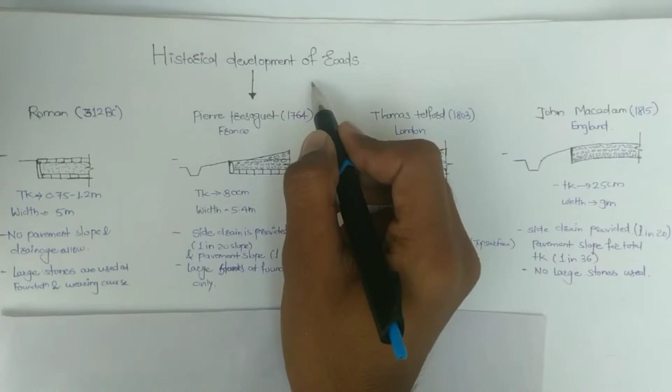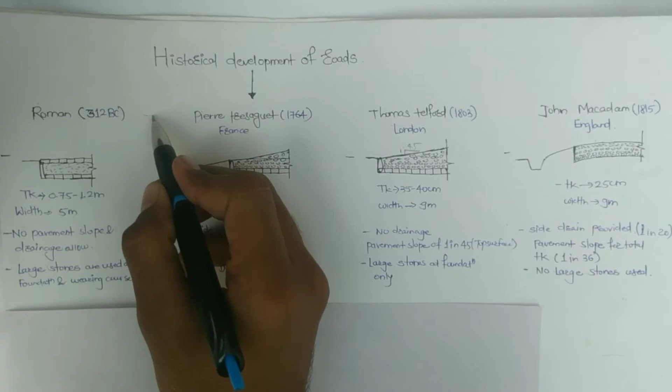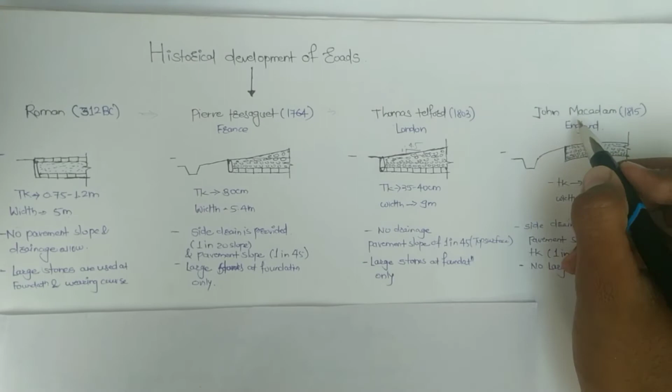First, Romans constructed roads in 312 BC. After some modification in the Roman construction techniques, Pierre Tresaguet constructed roads in France in 1764. After him, Thomas Telford in London constructed roads with some modification in 1803. After him, John Macadam in England constructed roads in 1815 with some modifications.

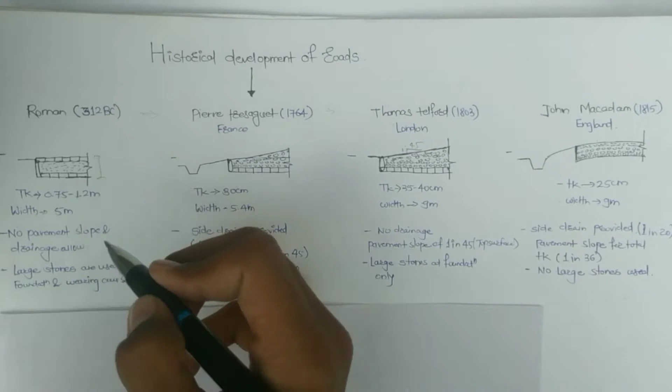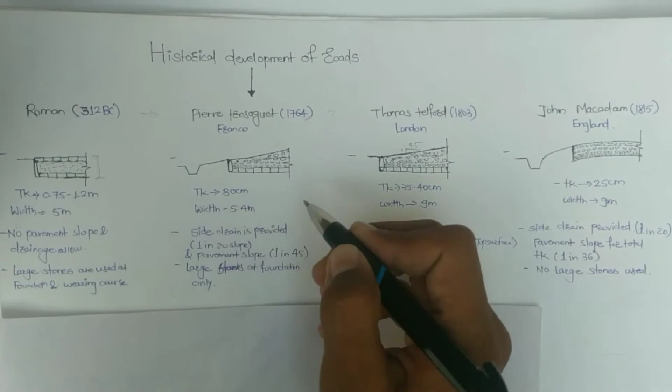In Roman roads, the thickness of pavement is 0.75 to 1.2 meters. Here the thickness is 30 centimeters, 35 to 40 centimeters, and 25 centimeters. Whereas width of the road is 5 meters, 5.4 meters, 9 meters, 9 meters.

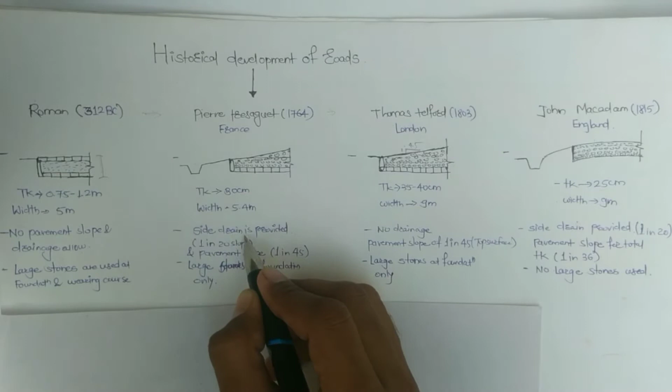In Roman roads, no pavement slope and drainage is allowed. Whereas in this construction, side drains are provided with a slope of 1:20, and the top surface pavement slope is 1:45.

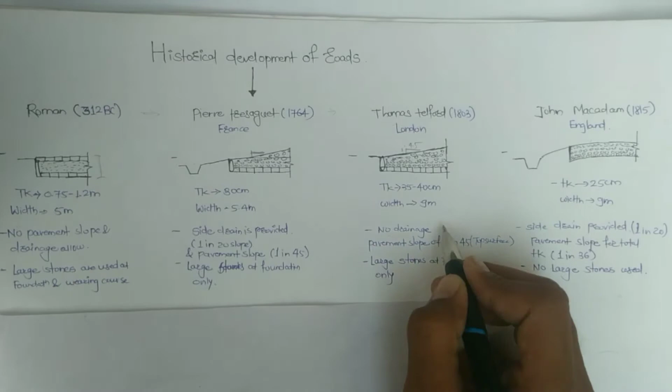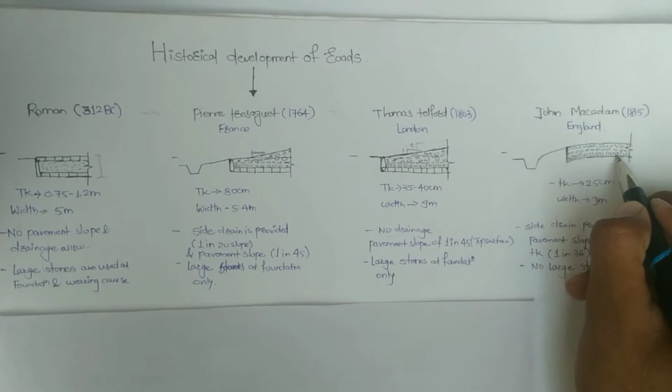In this construction, no drainage is allowed, no drainage facility is provided, with a pavement slope of 1:45 at the top surface. In this construction, side drains are provided with a slope of 1:20, and the whole pavement thickness is provided with a slope of 1:36.

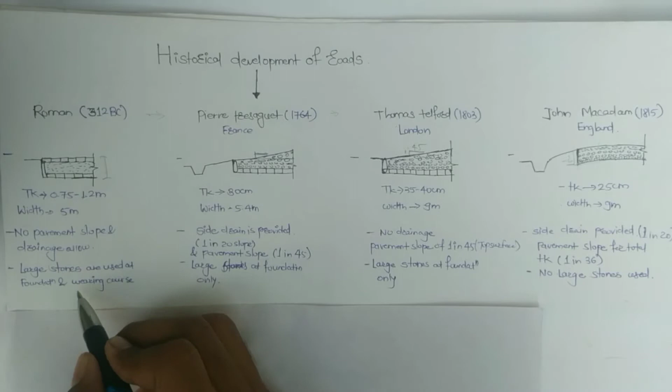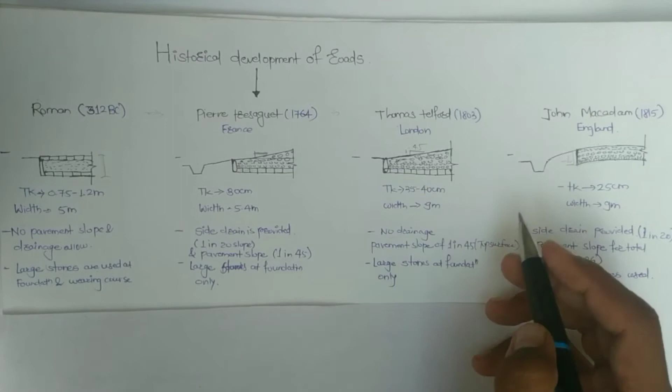In Roman construction, large stones are used at the top surface as well as the bottom. In this construction, large stones at foundation are used only at the foundations. Similarly, in Thomas Telford's construction, large stones at foundation only. In John Macadam's construction, no large stones are used.

Development of roads in India.

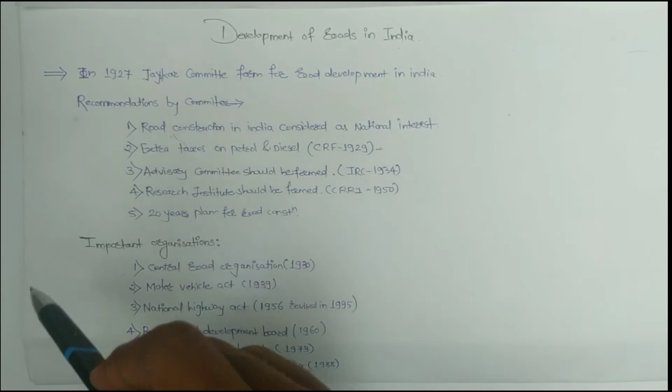In 1927, the Jayakar committee was held for discussion on road development in India. After the discussion, the committee gave some recommendations. First, road construction in India should be considered as a national interest.

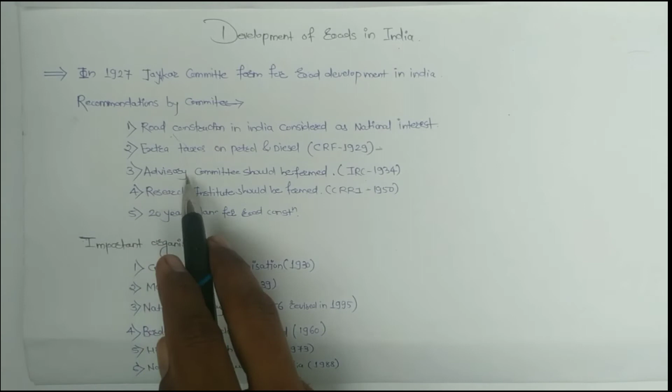Next, extra taxes on petrol and diesel will be collected by the organization Central Road Fund, which was formed in 1929. An advisory committee should be formed; that committee is the Indian Road Congress, formed in 1934.

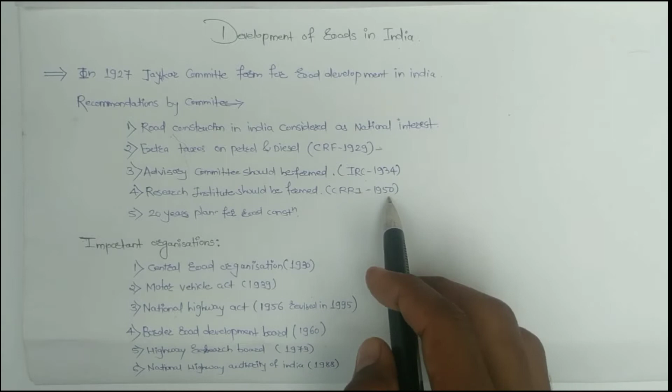A research institute should be formed; that is the Central Road Research Institute, formed in 1950. The fifth recommendation is that a 20-year plan should be prepared for road construction.

These are some important organizations which were asked repeatedly in the examination. First is the Central Road Organization, formed in 1930. Motor Vehicle Act in 1939. National Highway Act 1956, which was revised in 1995.

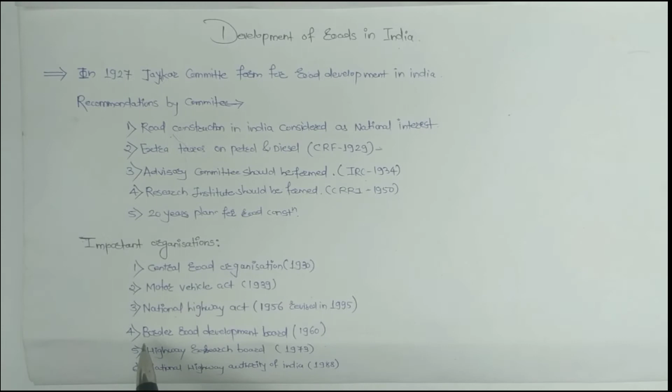Border Road Development Board in 1960. Highway Research Board in 1973. National Highway Authority of India.

Regarding the 20-year road plan: out of the 5 recommendations, the Jayakar committee gave one recommendation that a 20-year road plan should be prepared, one by one.

There are three 20-year road plans: the Nagpur Road Plan, the Bombay Plan, and the Lucknow Plan. The Nagpur Road Plan runs from 1943 to 1961; it is not actually a 20-year plan, it is an 18-year road plan.

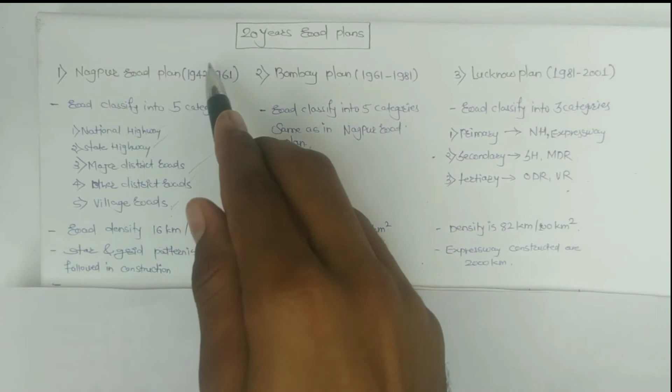After 18 years, the government realized that it was not efficient for road development in India. Hence, after 1961, a new plan was adopted, the Bombay Plan, from 1961 to 1981. The Lucknow Plan runs from 1981 to 2001.

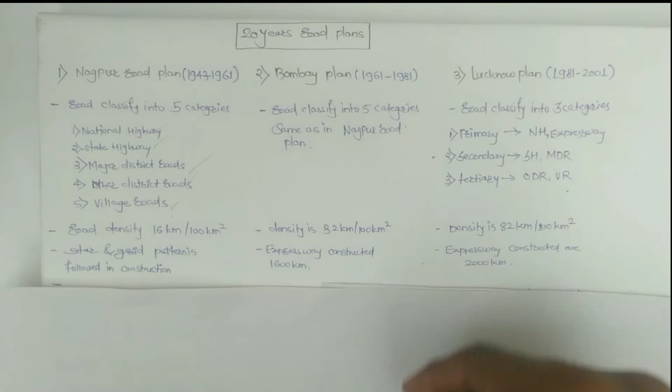We are going to compare these 3 road plans point by point. First is on the basis of classification. The Nagpur Road Plan is classified into 5 categories: national highway, state highway, major district road, other district road, and village road.

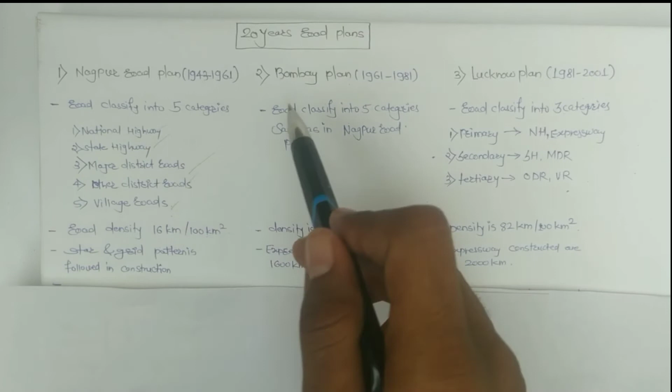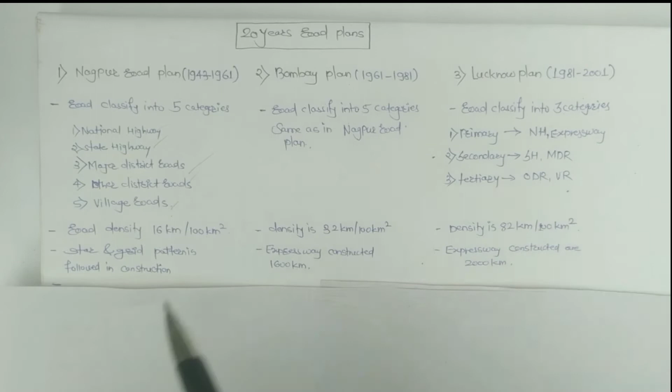Similarly, the Bombay Plan is classified, but in the case of the Lucknow Plan, roads are classified into 3 categories: primary (national highway and expressway), secondary (state highway and major district road), and tertiary (other district road and village roads). Next point is on the basis of road density.

In the Nagpur Road Plan, road density is 16 km per 100 km square area, whereas in the Bombay Plan it is 32, and in the case of the Lucknow Plan it is 82. The Nagpur Road Plan is designed on the star and grid pattern.

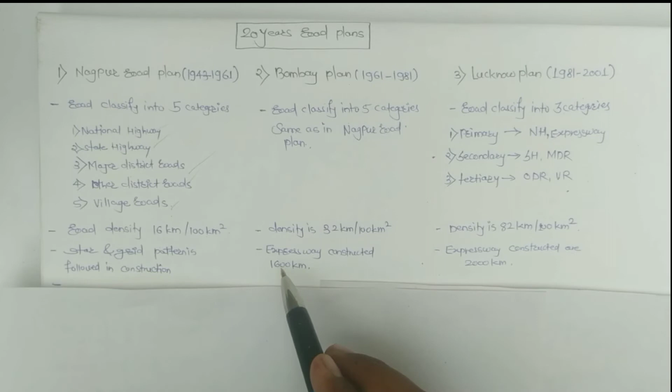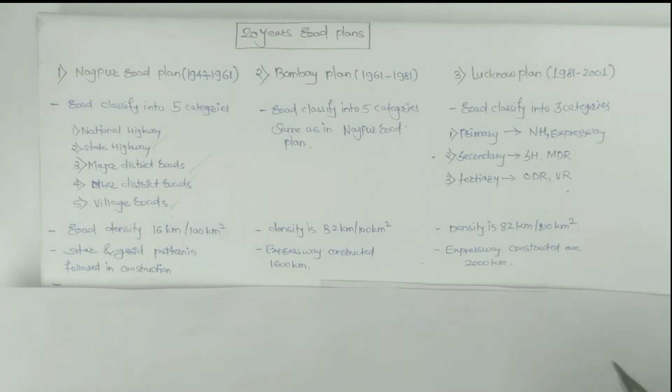The expressway in Bombay plan is constructed for 1600 km, whereas in case of Lucknow plan there is 2000 km length of expressway. There are some formulas for the calculation of the length constructed in road plan.

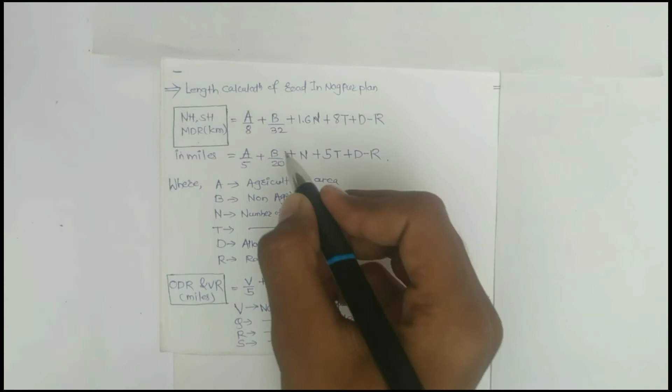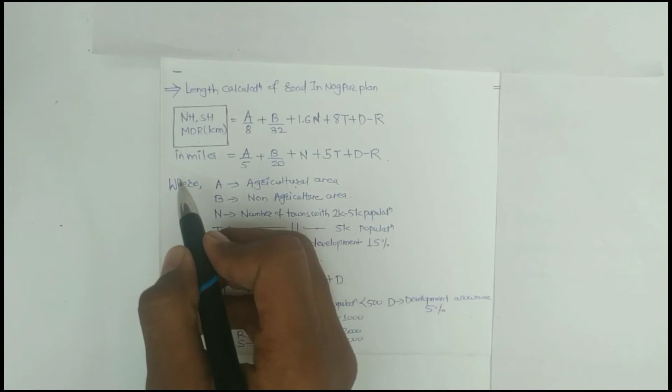In case of Nagpur plan, for the national highway, state highway and major district road, the road length is calculated by the formula A/8 + B/32 + 1.6N + 8T + D - R. This calculated length is in kilometers.

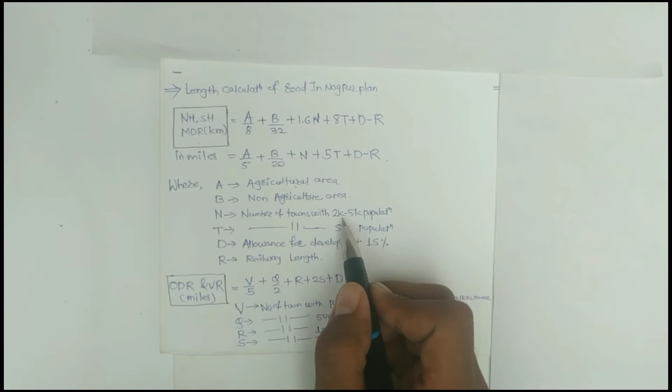To calculate the length in miles, the formula is A/5 + B/20 + n + 5T + D - R, where A is the agricultural area, B is non-agricultural area, n is the number of towns with population 2000 to 5000, T is the number of towns with population above 5000, and D is the allowance for development. In case of Nagpur plan it is 15%. R is the railway length.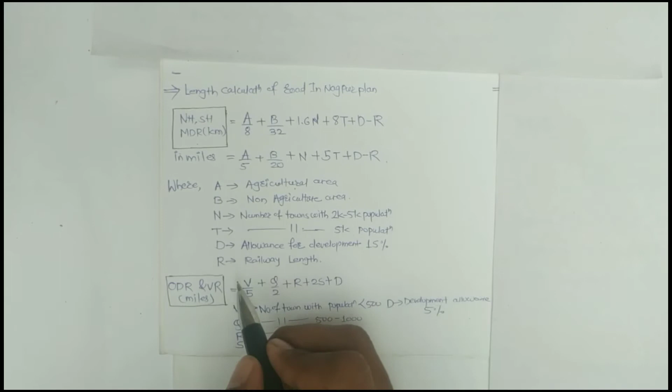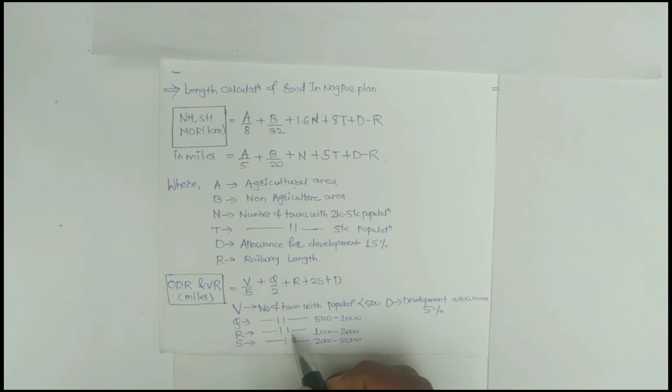For other roads, that is other district roads and village roads, the length calculated in miles is V/5 + Q/2 + R + 2S + D, where V is the number of towns with population less than 500, Q is the number of towns with population 500 to 1000, R is the number of towns with population 1000 to 2000, S is the number of towns with population 2000 to 5000, and D is the development allowance. In case of other district roads and village roads, it is 5%.

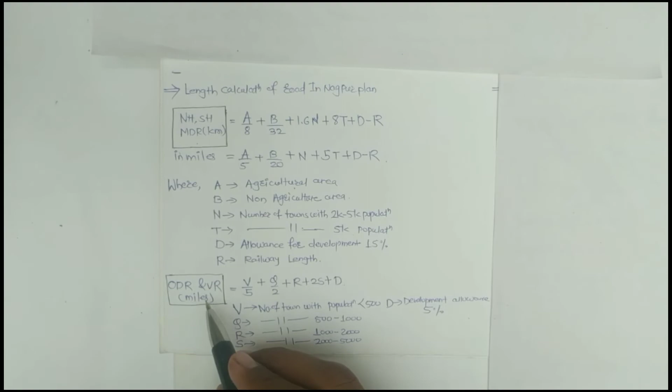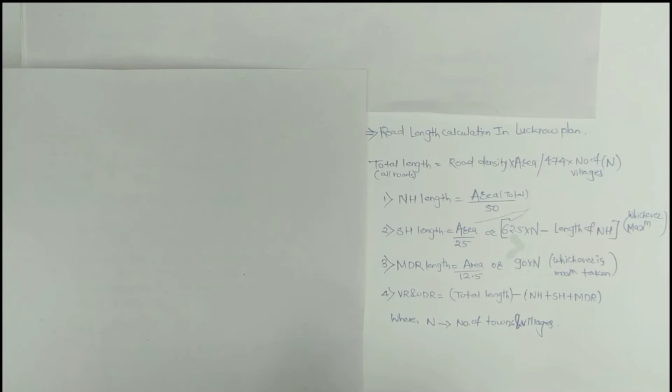Similar to the Nagpur road plan, the road length is calculated in case of Lucknow plan with some formulas. Total length is calculated by road density into the area, that is 4.74 into number of villages, whereas national highway length is calculated by the formula total area divided by 50.

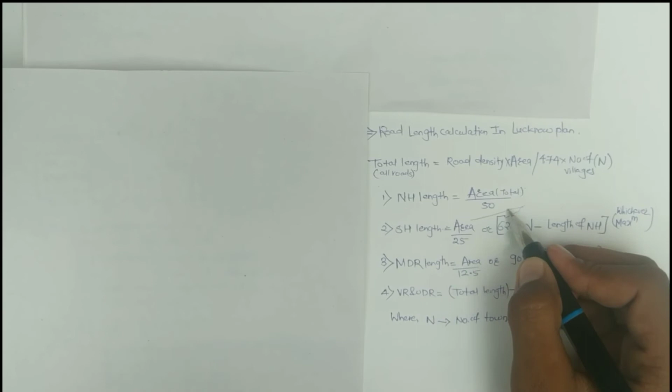State highway length is calculated by total area divided by 25, or 62.5 into number of villages minus length of national highway. Whichever is maximum from these both is taken as the length of state highway.

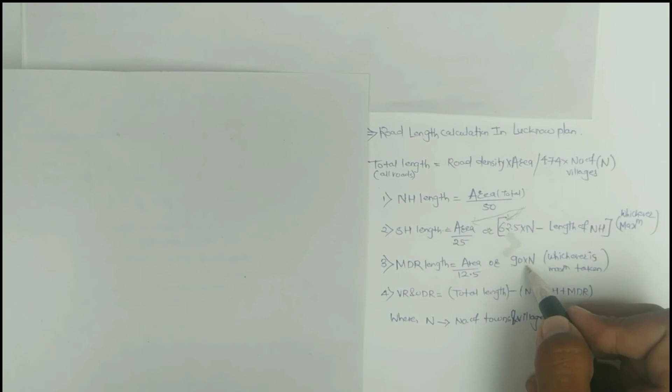Major district road length is total area divided by 12.5, or 90 into N, where N is the number of villages or towns. Whichever is maximum from these both is taken as the major district road length.

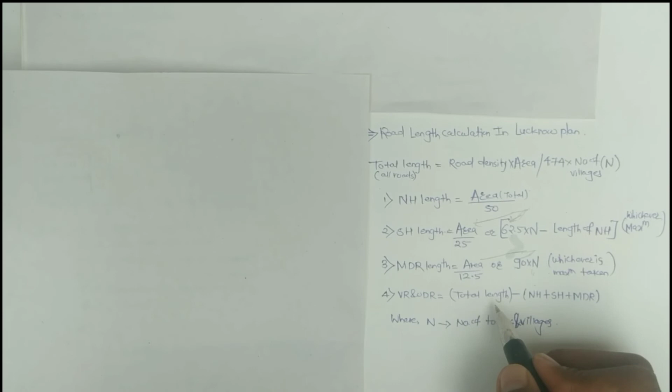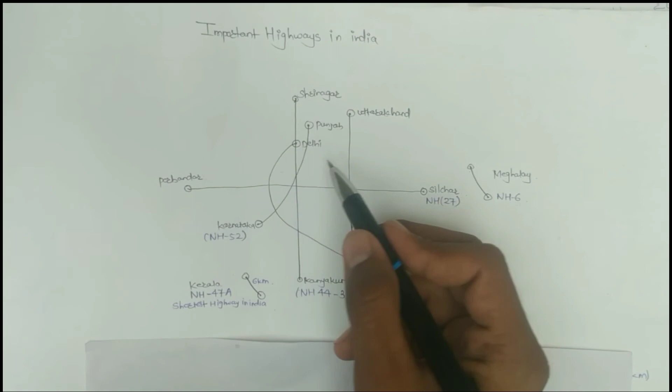Next highway is Delhi to Chennai, it is NH48. From Punjab to Karnataka it is NH52. Next highway in Meghalaya is NH6, whereas the smallest highway, or we can call it the shortest highway in India, is Kerala NH47A.

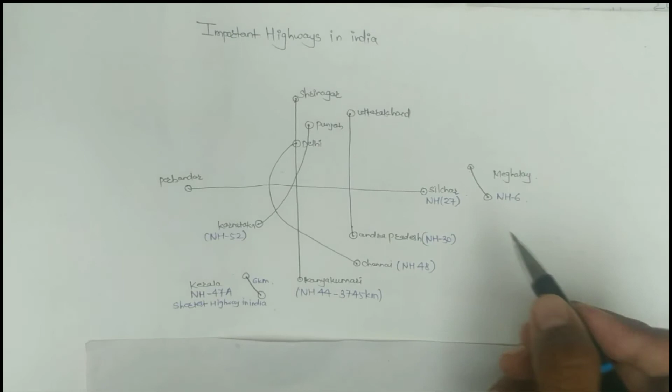The length of the highway is 6 km. The highway NH30 is from Uttarakhand to Andhra Pradesh.

After the important highways, one question is asked: the golden quadrilateral length is 5846 km. The golden quadrilateral consists of Delhi to Mumbai, Mumbai to Chennai, and Chennai to Karnataka. From Delhi to Mumbai and Mumbai to Chennai it is called NH48. From Delhi to Karnataka it is NH19, and from Chennai to Karnataka it is NH16.

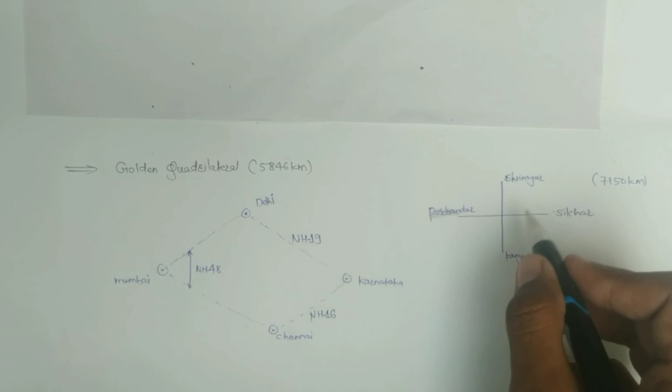The next question is about the two longest highways in India: Srinagar to Kanyakumari and Porbandar to Silchar. The total length of these both highways is 7150 km.

Next is Pradhan Mantri Gram Sadak Yojana. This question is not frequently asked, but from the MCQ point of view it is important.

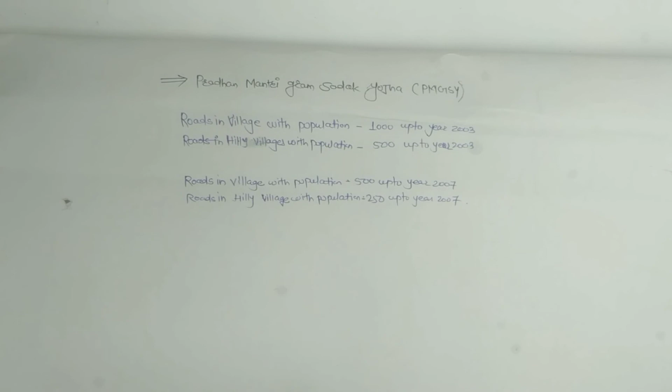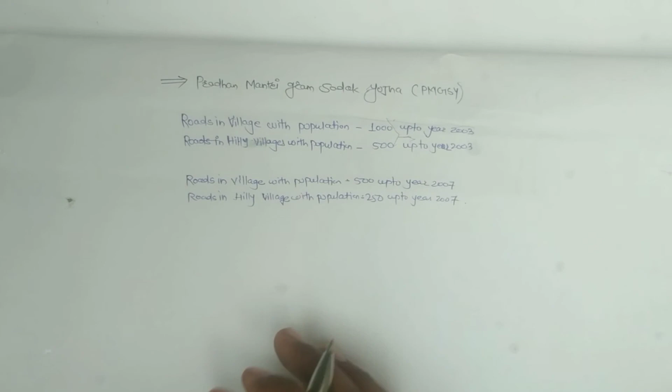Roads in villages with population 1000 and in hilly villages with population 500 were constructed in certain years: from year 2000 up to year 2003. Up to 2007, two more categories of roads were constructed: roads in villages with population 500 and roads in hilly villages with population...